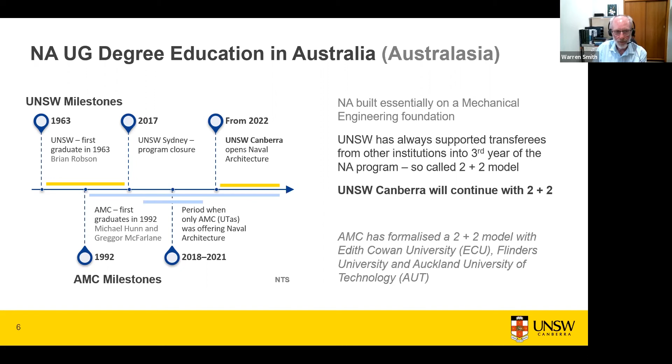If we talk about UNSW at a glance, a distinctive feature is that it is one of the Group of 8 universities, one of the research-intensive universities in the Australian context. It has 3 major campuses in Sydney: Kensington, Paddington for the art and design faculty or part thereof, and UNSW Canberra.

The university is organised with 6 formal faculties across 6 discipline areas and 1 college. A college in university language is a multidisciplinary faculty equivalent, and that college is UNSW Canberra. If we think about the engineering school at Kensington, electrical engineering, mechanical engineering - all the schools within the engineering faculty are engineering. But as you'll see later, UNSW Canberra is a multidisciplinary faculty, and that adds to its strength in our military context.

Broadly, the university comprises 47 schools and 125 external centres and institutes, and is in the top 5 to 10%, depending on whose rankings you read, in terms of world universities. We're one of Australia's best in engineering, and these measures are across the university as a whole.

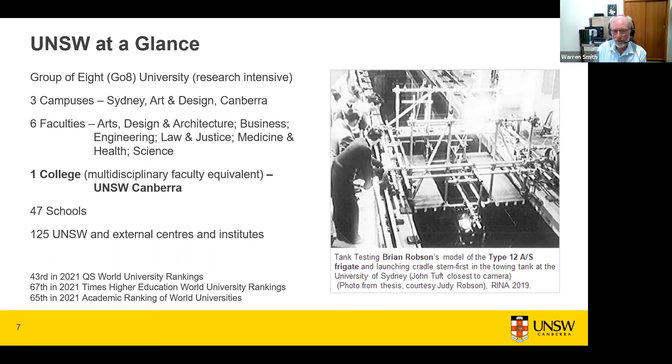So dating back to when Brian Robson graduated, UNSW Sydney, Kensington, never had its own towing tank. He used one at the University of Sydney, which I believe no longer exists - I'm not sure what is there now, whether they're growing hydroponics in a channel or they've filled it in. But in the same way, while AMC has facilities, we won't be aiming to replicate them, but we want to be complementing activities in our naval architectural space.

So let's turn to talking a little bit about UNSW and the relationship with Defence. When you arrive off Northcott Drive at the Defence Force Academy, you're greeted with a sign that clearly marks the partnership between the university and the Commonwealth in providing education in a military context at the Defence Force Academy.

The history here between the two organisations reaches back to discussions happening within Defence in the 1950s, where it was recognised that it would be valuable to have university education as part of officer training. So the RAAF, the Air Force, was first to step in this direction and formally established a relationship in 1960 with the University of Melbourne to incorporate a degree into the programs being run out of the RAAF College or Academy at Point Cook in Victoria.

It followed that Army and Navy both started to negotiate with the University of New South Wales, and it took a few years, but in 1967, for both Army and Navy, arrangements were established whereby UNSW would be the provider of that university education sought and forecast back in the 50s. So in 1967, UNSW established a faculty of the university, labelled the Faculty of Military Studies, at the Royal Military College, Duntroon, in Canberra.

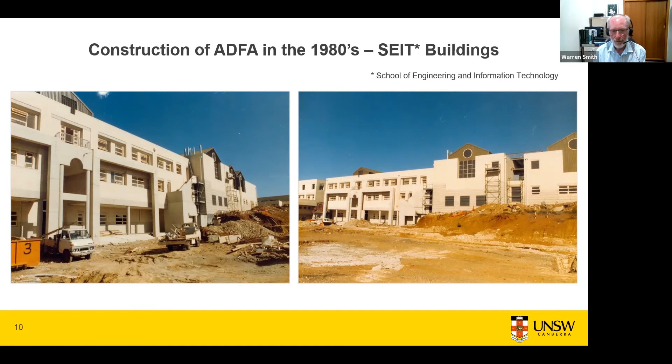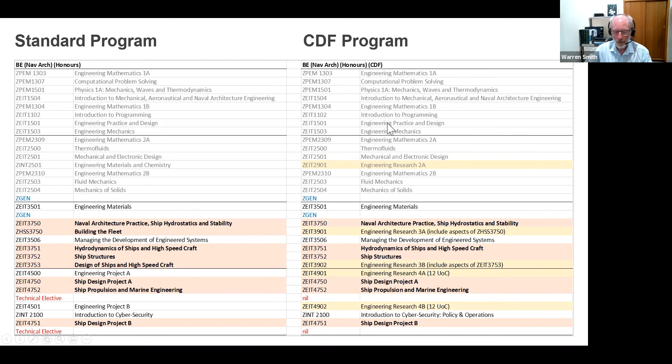Let's just home in on the standard program, 3rd and 4th years - 8 3rd year courses, 8 4th year courses. They also do a thesis, so it's a common course code for all of the engineering students, but you'd expect that the thesis, part A and part B, would also be naval architecture founded, and the 2 electives in the standard program would be related to naval architecture.

So we might think, while we're teaching 8 courses that differentiate from Mech and Aero, from a student perspective there are 12 of the 16 in the 3rd and 4th year that are naval architecture related. A common 1st year with Mech and Aero, and an almost common 2nd year with Mech and Aero. And this structuring of courses is very similar to the former program at Kensington.

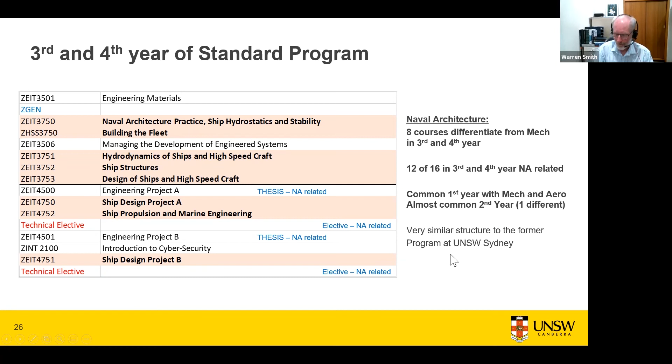This slide is there for you to come back to, perhaps in the recorded session, or you could go to the university website to see a little bit more detail in the handbook descriptions. We're in the process of fleshing out exactly what the course material will be for each of these courses.

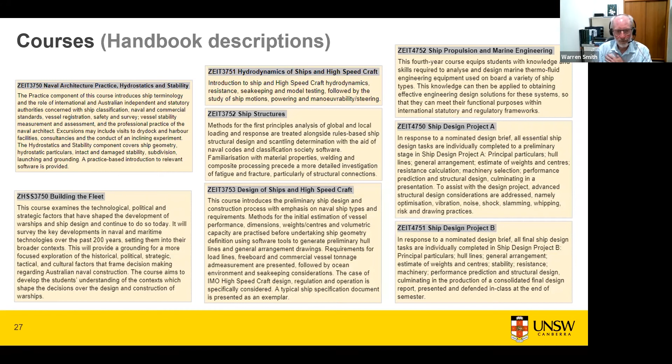Clearly our objective is to teach these courses with a grey ship focus. So where perhaps before there might have been general discussion about high-speed craft referring to fast ferries, we might be talking more about patrol boats for Navy, but we would mention on the side there's fast ferries as well, and some students may elect to dig deeper into the commercial sectors. But we will be using, where we can, examples that are relevant to Navy.

When all of our undergraduate students lived in the lines and ate in the mess, perhaps these communal spaces weren't quite so important. But certainly with civilian students on campus now, we need to be providing greater opportunity for the students to collaborate and work together in these learning and teaching spaces.

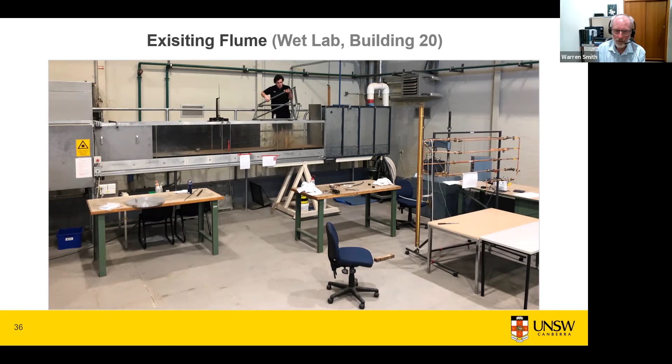We do have a few ship models. This setup has supported my naval architecture elective for the mechanical and aero students in the past, and we'll continue to use this and others similar to it going forward. In the background you can see one of the hydraulics benches that we have for hydraulics labs that will be appropriate.

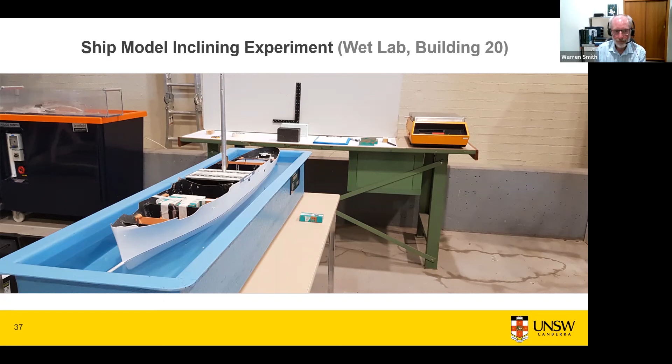We've got flow benches, etc. There's the potential to develop some rigs that would allow us to use the ADFA pool as a potential model test facility, in the same way that we have a body of water, Lake Burley Griffin, and the ADFA Boat Shed down in Yarralumla Bay, that may afford us another open water lake test facility going forward.

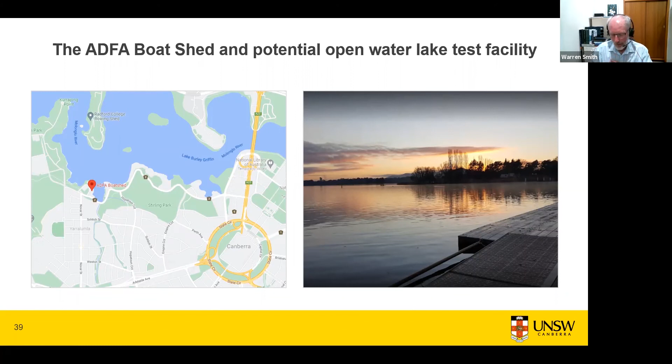The cooperation we spoke of earlier with AMC - we have agreement with AMC to visit and use their facilities, and that will lead to a semester 1 fourth year study tour, which will be part of the students' work experience program. There's certainly a precedent for UNSW students going down to AMC, with students from Kensington having gone down regularly in past years. And certainly our desire, as I said, we're not trying to compete. We're not going to be building a new towing tank or wave basin, but to strengthen existing collaborative, cooperative, collegial relationships with AMC. Both David and Ahmed will talk a little bit more about that.

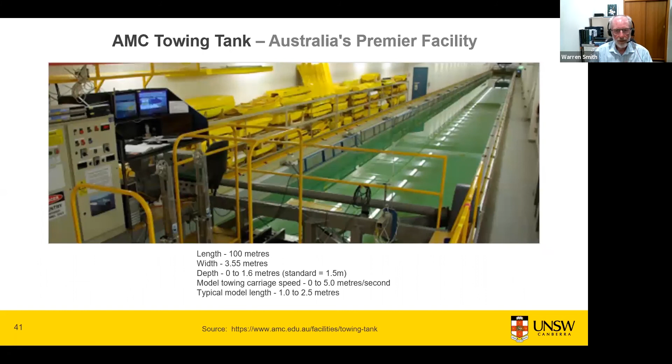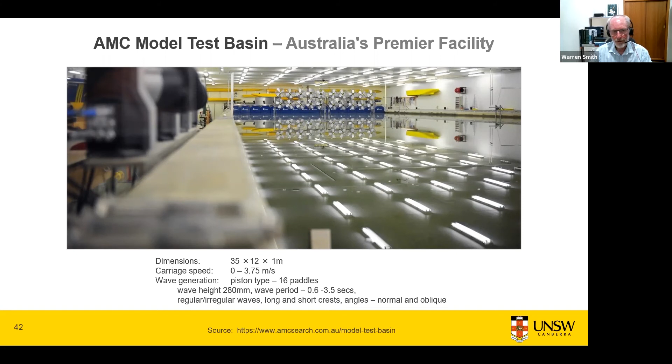As I said, we're not going to replicate Australia's premier facility in the towing tank or model test basin. We'll use that to allow our students to understand what resources are available broadly within the context of the national shipbuilding policy and resources. But we will institute a training cruise, with the possibility of using Bluefin, AMC's vessel, for that.

Or Navy assets such as Navy's training vessel, MV Sycamore, based out of Jervis Bay. So at this point, having provided an overview of our environment and our course and program planning, I'll hand over to David to say a few words.

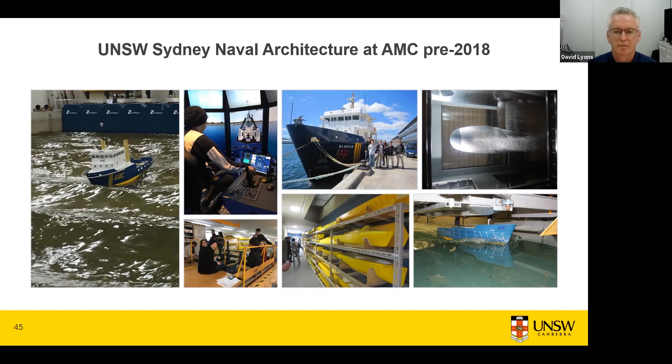Other than attending the campus at Launceston and the facilities there, the group also travelled south to Hobart to visit Incat Tasmania and Richardson Devine Marine as well. Both don't need much introduction, if any - global reputed shipyards mainly in fast ferry or fast high-speed craft construction.

Meanwhile, back up in Sydney, again in third year, we each year attended Rozelle Bay to the Sydney Heritage Fleet to conduct an inclining on one of the Heritage Fleet tugs.

This particular one shown here is the Currawong, and you can see Phil Helmore there, literally in the engine room - the tea room on the bottom right, but the engine room up the top there, where Phil looks like he's setting up the pendulum in the bucket of water.

The students, as a group, are involved in the data acquisition, the shifting of the weights from side to side, and they produce an inclining experiment report in the form of a brief stability book, and that whole thing takes an entire morning. We've usually been blessed with good conditions, so hydrometers are used, temperatures are taken. It's a real world experience.

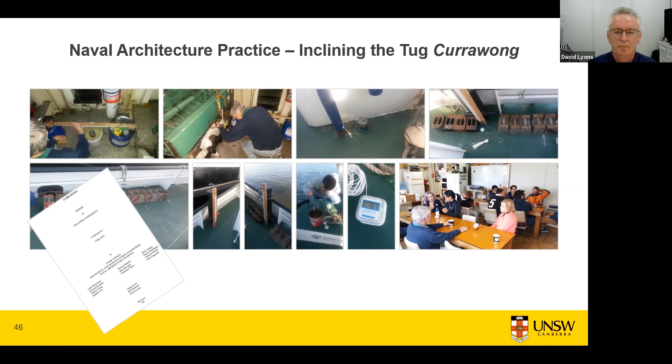Now, although this is what we did do, we fully intend to continue to do this sort of inclining experiment, hopefully with the kind cooperation of the Sydney Heritage Fleet. So that will remain an integral part of the program going forward. It's just that we'll be bringing the cohort of students up from Canberra to do that. Next slide, please, Warren.

We, through good management, really managed the time so that we can take the cohorts around to a number of these excursions in Sydney. One of the previous slides that Warren showed indicated that there'd also be visits to classification societies. We expect to continue those with Lloyd's Register or DNV, not to exclude some of the others who have offices in Sydney.

Similarly, we in the past have enjoyed visits to Incat Crowther, up at Belrose. Our focus is grey ship, but we are blessed to have such large and productive consultancies based in Sydney in Incat Crowther and 123, not to exclude some of the other offices there, that we expect to be able to continue to conduct those visits. A lot of the staff in those offices are our near-term graduates as well.

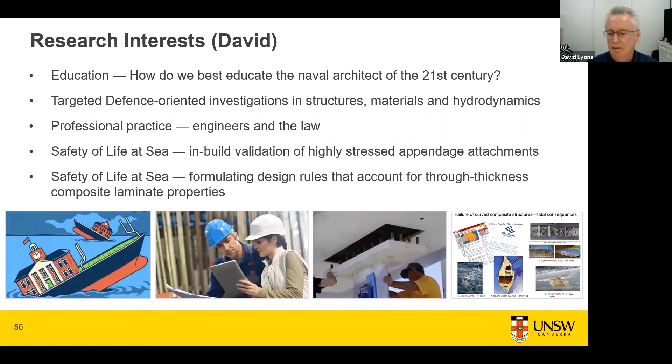I believe I won't make it long. I believe I won't make it long at all. Thank you, David, so much. Thank you, Warren, for introducing me.

First of all, I'm really excited about this cutting edge project that we are trying to stand up, and we are putting really our effort to stand up a unique naval architecture program in UNSW.

First of all, as a brief on my background, I actually joined the AMC back in 2012, November 2012, where I studied there as a PhD student and also as a lecturer for the seafarers up to chief engineer level in the National Center for Ports and Shipping. Afterwards, I joined also the AMC staff, proudly, as a lecturer in the National Center for Maritime Engineering and Hydrodynamics. During my time there in AMC, which spans over 6 years, I used, utilized, and taught the facilities.

Most of the facilities around, but because it's huge, I couldn't use all of it. Our aim in the new program is not to replicate any Australian facility which already exists, but to build collaboration, build up a unique program in collaboration also with all Australian facilities that already exist.

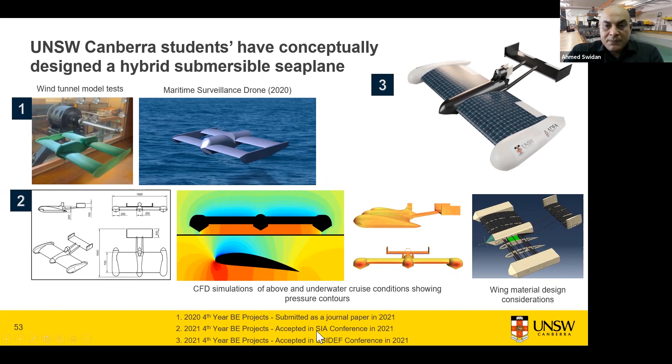Next slide please. It's not only about the undergraduate projects, we are also giving some flavor to our PhD students. Here is one example of PhD outcomes, working with the aim of this project to lower the risk of visual detection of submarine masts, and we are getting some potential and promising results out of this project.

For example, with the merged foil, as you can see, it really decreases both the plume height and also the drag force significantly.

I'm so happy to see this outcome, because when I saw, just a couple of months or one month ago, Europeans introducing some autonomous vessels, they used the same type of mast - the merged foil - which to my knowledge had never been used before.

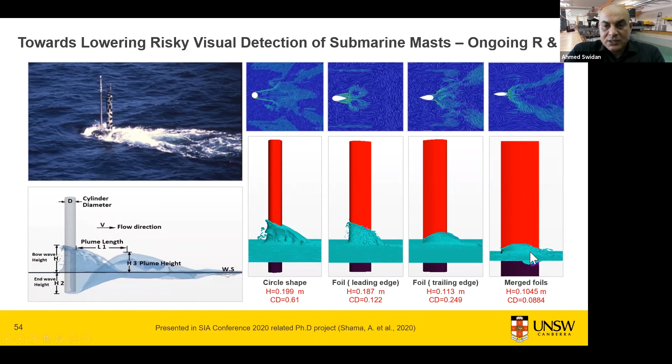Next slide please. So it is feasible. This is my last slide, where I want to share some of my research interests: full-scale sea trials, including powering and estimating the resistance or speed of vessels, CFD simulations, ship classification and certification, experimental hydrodynamic tests, including the drop testing facility - if we can just run this video.

This was conducted in 2016 in collaboration with Auckland University while I was at AMC, and also towing tank experiments. This is the experiment that was awarded the Walter Atkinson Award, reducing the slam by around 40% on two NPL models - we added that center bow in between. It's a generic center bow, using the NPL catamaran model.

Another area of interest I'm really digging into is ship recycling according to the Hong Kong Convention of 2009, which shall come into force in 2023, including the ship recycling facility plan, the ship recycling cutting plan, the inventory of hazardous material - which has been in force since last December 2020 - and also the waste management plan.

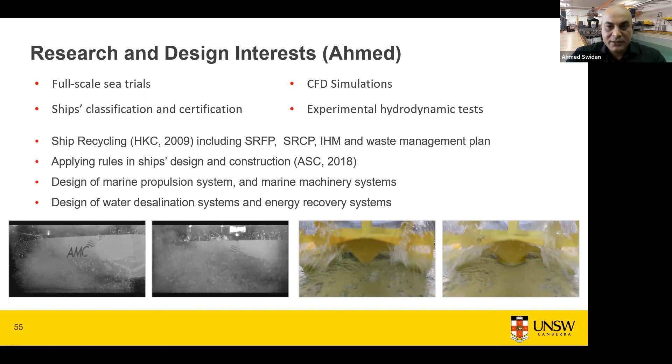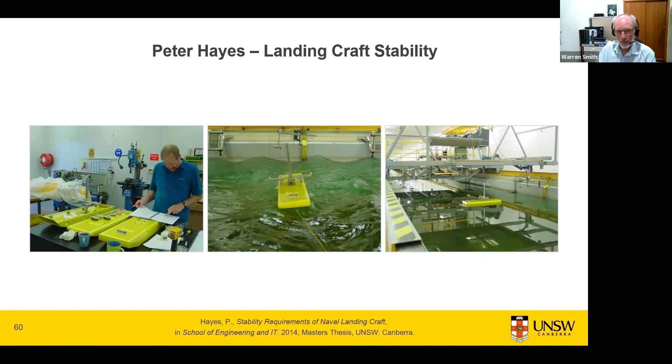So to summarise the key takeaways, and I know it's coming up on 10 to 8, I thank you for your patience with us. I think everyone has stuck with us.

We look forward to subsequently growing, as we've alluded to, relevant research and postgraduate coursework opportunities, which could be how we stand up a master's program to convert a mechanical engineer to a naval architect, for example, at the postgraduate level. Perhaps there'd be special other courses dealing with extensions to what we can teach in an undergraduate program into submarine design or more detailed warship design, which could lead to thinking about, as I saw in one of the questions, something around nuclear propulsion.